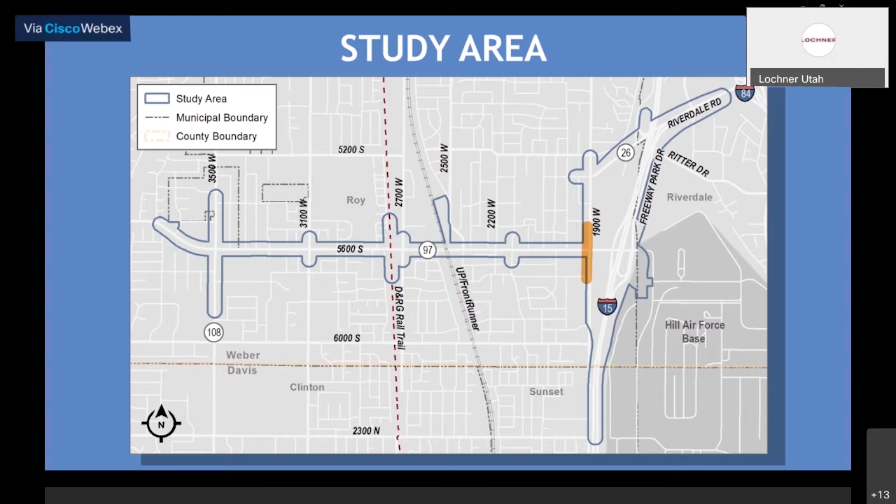The study area for the 5600 South Environmental Assessment is shown here. It includes 5600 South from 3500 West to the Hill Air Force Base North Gate, and includes modifications to the 5600 South and Interstate 15 interchange. The project area also includes improvements along 1900 West, from 5700 South to Riverdale Road.

The purpose of the project is to meet future 2050 travel demand on 5600 South and at the I-15 5600 South interchange, and to improve safety conditions within this study area.

The project is needed because by 2050, major intersections such as 3100 West, 2700 West, 2200 West, 1900 West, and Freeway Park Drive would operationally fail during the AM or PM peak period if improvements are not made.

The project is also needed because UDOT crash data reports a high number of congestion-related crashes, and it is predicted that the number of crashes could increase by 2050 as traffic congestion increases. In addition, several pedestrian and bicycle-related crashes have occurred along the corridor.

A goal of the project is to accommodate active transportation, or transportation that is powered by human energy, primarily walking and bicycling along 5600 South.

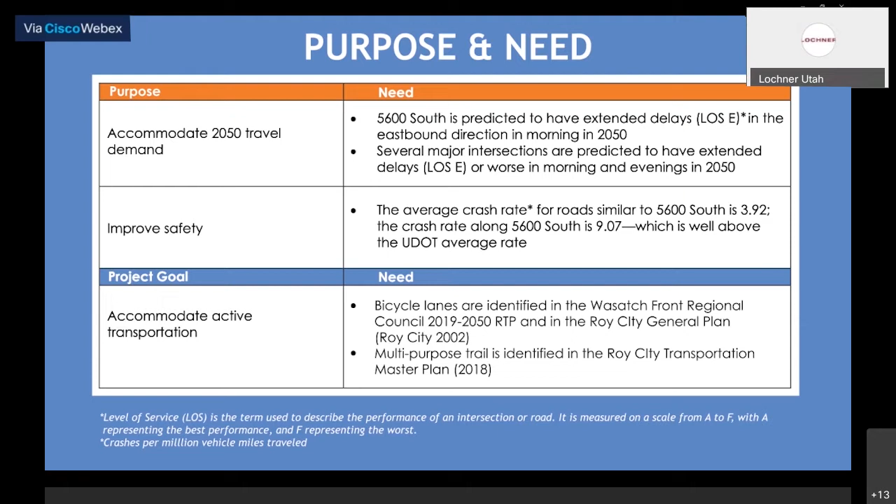Since the project scoping meeting held in 2018, UDOT has developed and screened alternatives to evaluate a range of design solutions. In fall of 2019, the team optimized the 5600 South alternatives to try to reduce the number of property and historic impacts, and identified a build alternative in winter 2019.

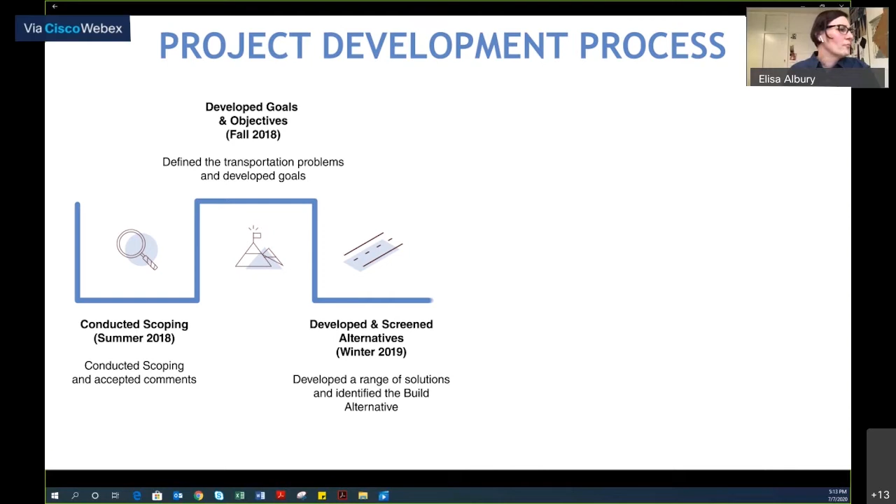The team evaluated the social and environmental impacts from the build alternative and the no build alternative in spring 2020. On June 23rd, UDOT published the environmental assessment for public view and comment. The public comment period is 30 days long and will end at midnight on July 23rd, 2020.

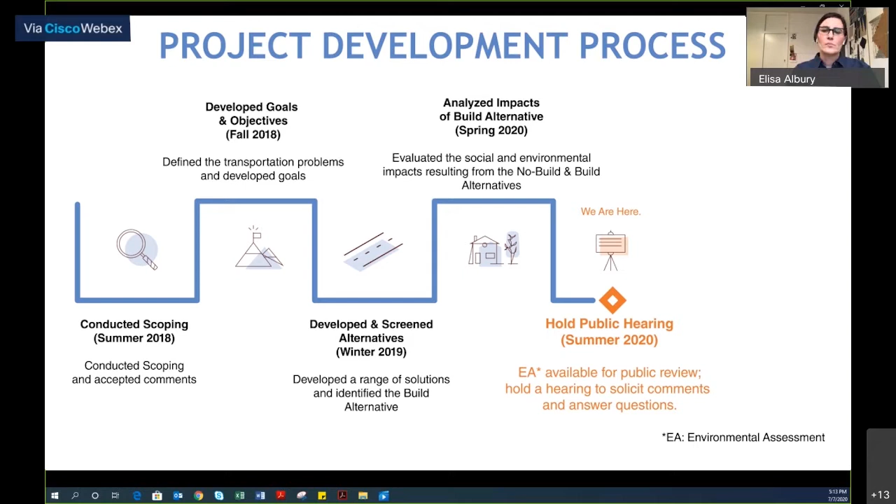Comments sent by postal service should be postmarked by July 23rd. The final environmental assessment and decision is anticipated in the fall of 2020. It will include response to public comments.

UDOT developed solutions called alternatives based on the needs identified for the study area. These alternatives were screened against the performance criteria identified based on the purpose and need for the project. Level 1 screening evaluated the alternative's ability to accommodate 2050 traffic demand and improve safety.

Level 2 screening evaluated the remaining alternative's ability to minimize Section 4(f) uses. We will define 4(f) uses later. It also evaluated minimizing acquisition and relocations, and ability to accommodate the project's active transportation goal.

In addition, UDOT evaluated a no-build alternative to provide a baseline for screening. The no-build alternative assumes the completion of all projects proposed in the Wasatch Front Regional Council 2019 to 2050 Regional Transportation Plan without improvements to the existing interchange or to the 5600 South corridor. You can find more details about this in Chapter 1 of the EA.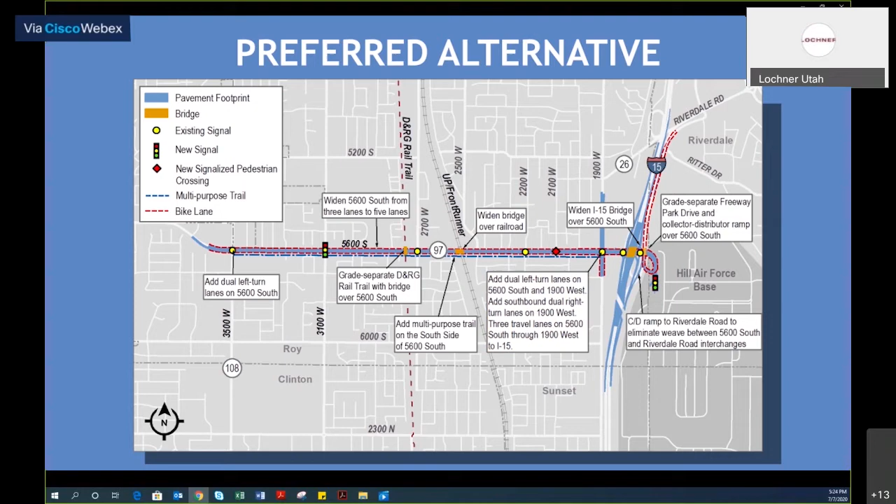It is anticipated the right-of-way acquisition along the south side of the corridor would result in surplus property. Surplus property is the part of the land that is not converted to a roadway facility after an agency, such as UDOT, acquires right-of-way for roadway improvement purposes.

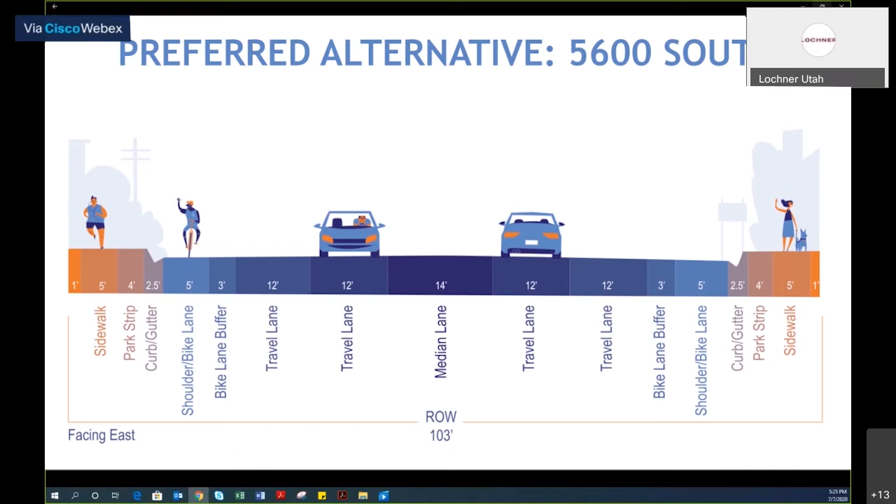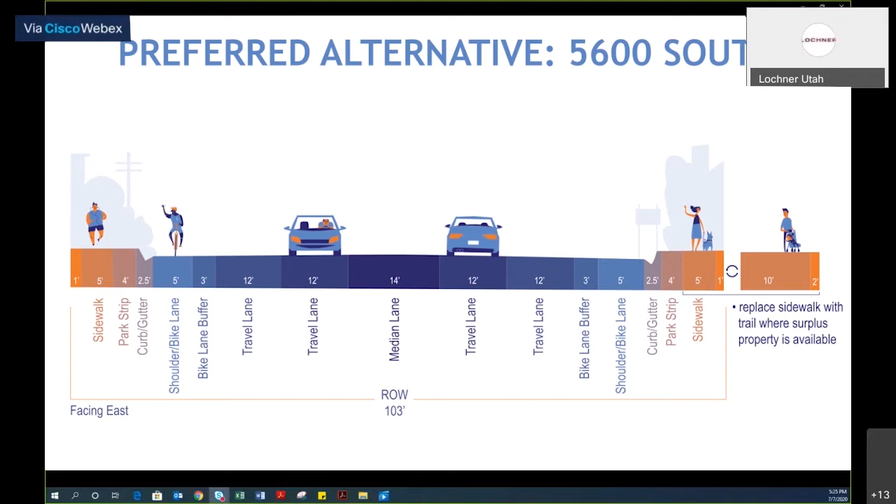UDOT elected to add the multi-purpose trail identified in Roy City's Transportation Master Plan to the build alternative as a result of this surplus. The multi-purpose trail would be located on the south side of the road and would replace the sidewalk where there is room. It would connect to the bike lanes on 1900 West intersection, continuing through the SPUI to Freeway Park Drive.

The single point urban interchange, or SPUI alternative, is selected as the preferred alternative at the I-15 interchange because it accommodates 2050 travel demand and improves safety. The SPUI improves safety by eliminating existing weaving on I-15 associated with the close spacing between the 5600 South interchange and the Riverdale Road northbound off-ramp.

The SPUI allows northbound drivers to exit at 5600 South and use the new bridge over 5600 South to continue north to Riverdale Road. In addition, the preferred alternative includes pedestrian and bicycle improvements, including bicycle lanes and sidewalk connection from 5600 South to Freeway Park Drive, and signed bicycle lanes in the shoulders of Freeway Park Drive on both sides of the road.

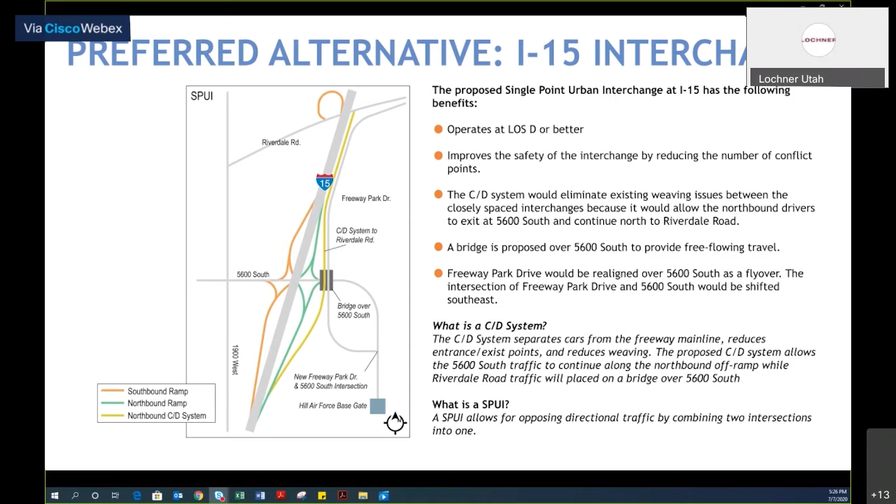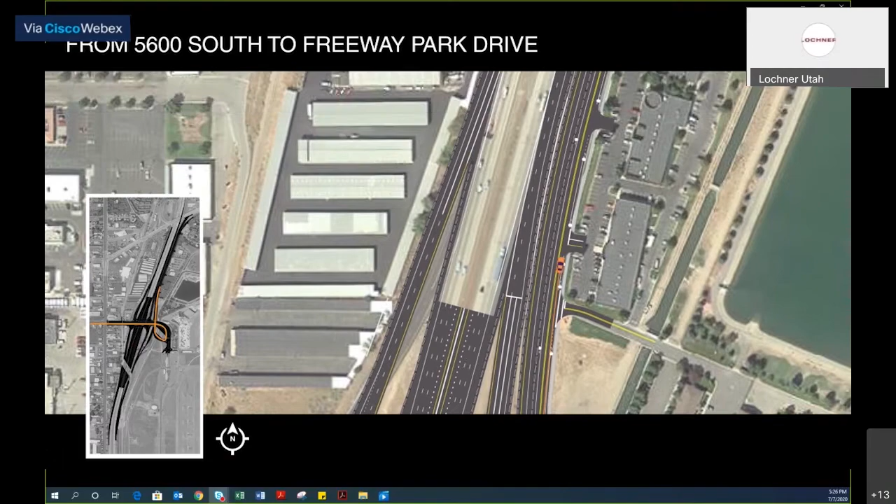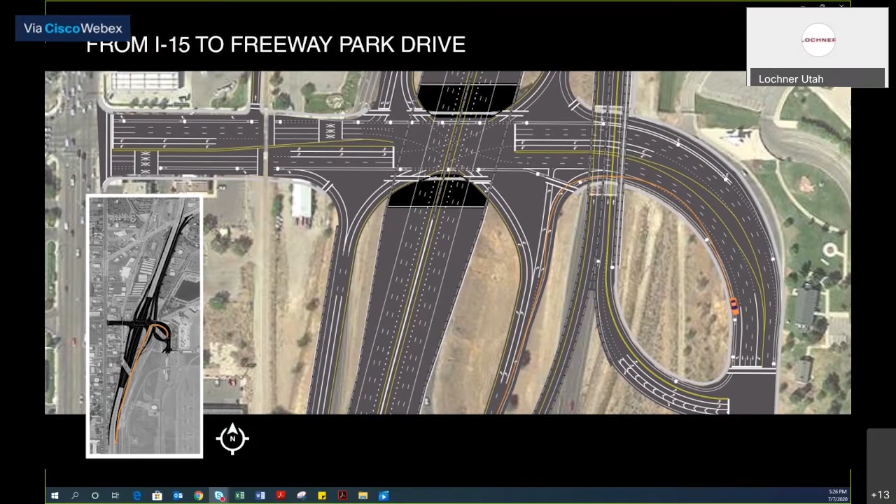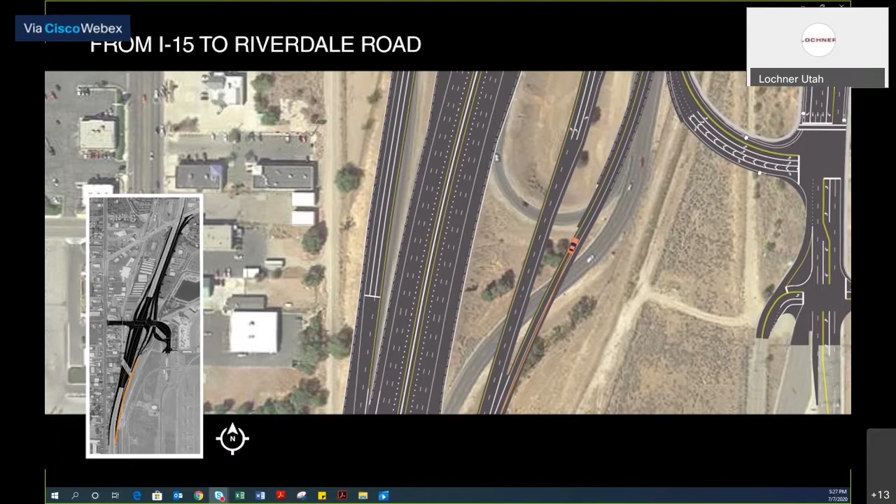This video shows how vehicles on 5600 South will access Freeway Park Drive, how vehicles on Freeway Park Drive will access 5600 South, how vehicles on I-15 can access Freeway Park Drive, how vehicles can use the C/D ramp to access Riverdale Road, and finally, active transportation improvements throughout the interchange.

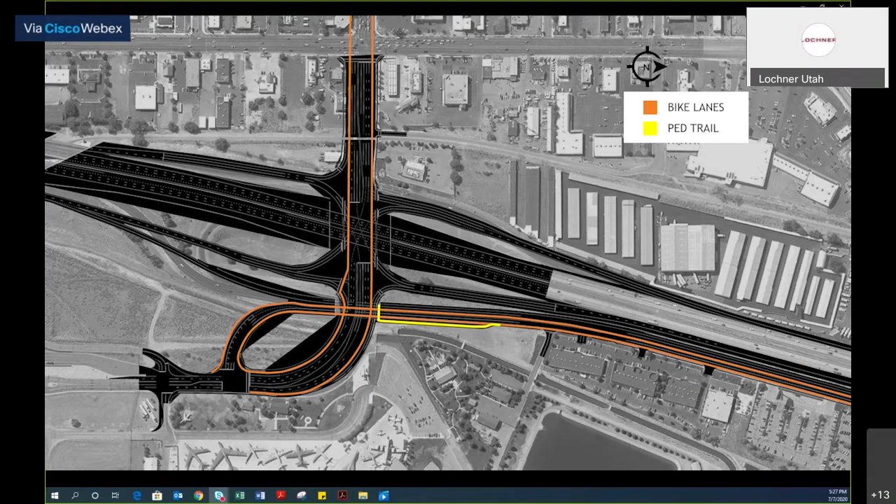The same summary table is located in the executive summary chapter, and impacts to each resource evaluated are discussed in detail in Chapter 3 of the environmental assessment.

The comment period is 30 days long and ends on July 23rd. All comments must be submitted by midnight on July 23rd in order to be included in the official project record and in the final EA.

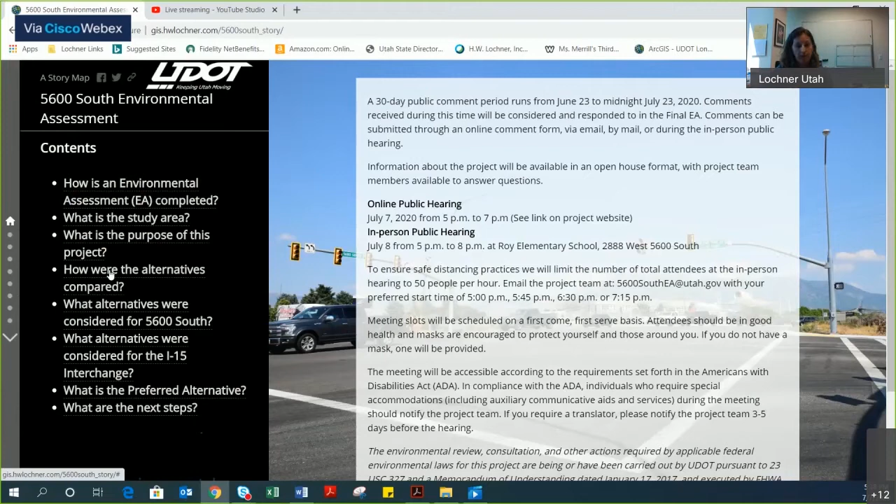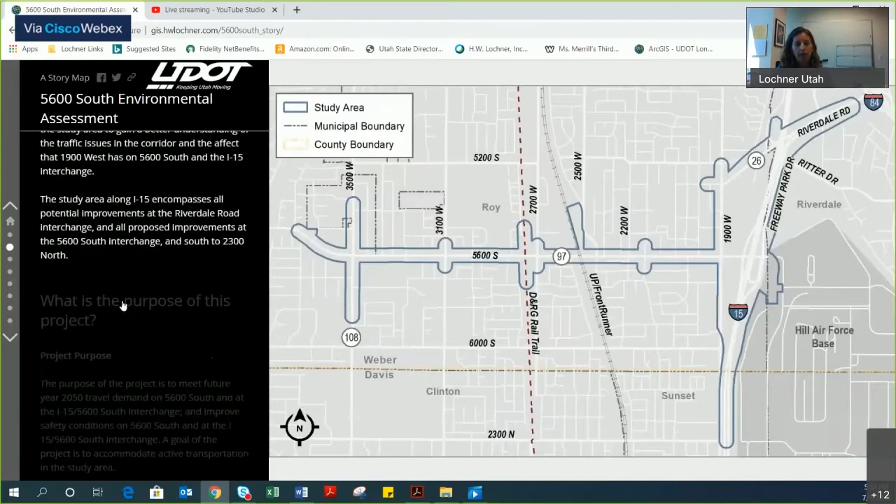Just going through a little bit, we have some of the same materials that we've presented tonight. I won't go too far into the details of the story map, but I want to show you that there are some links that will get you more information. Especially down at the bottom of the story map, this is the most helpful - that is where we have interactive maps that will show you the preferred alternative, the design, and the impacts.

So you can open up these links. It opens up almost similar to a Google Earth type format where you can look around the study area, zoom in on certain areas that you're interested in, and get more information that way.

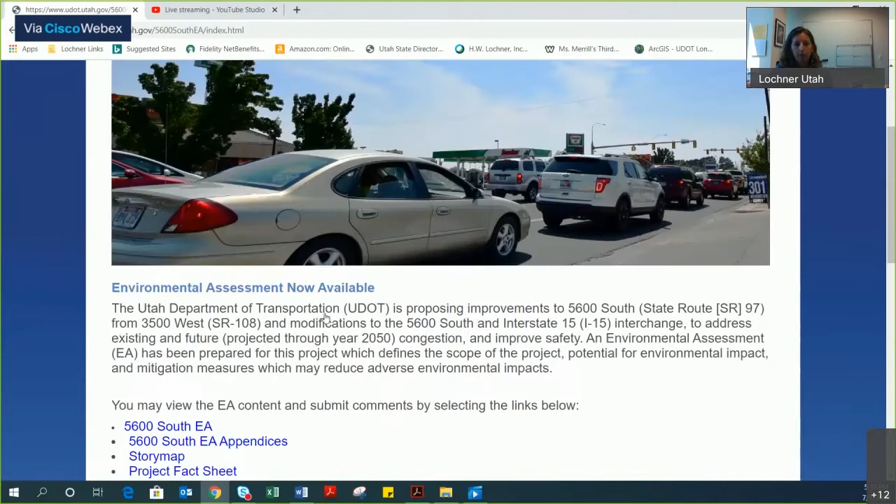Going back to the main landing page of the website, this is more information on how you can participate tonight and tomorrow if you'd like. Right here we have right-of-way materials, and as Tom had mentioned, we won't really be getting into the specifics of each property owner and specifics of each property.

In March of 2020, we did have a right-of-way workshop, and we reached out to individuals that we anticipate would experience a full acquisition from the project, and we presented these materials. It's an overview of the right-of-way process with some frequently asked questions, as well as some links to helpful materials so you can better understand the right-of-way process. We've left these materials available for anyone who's interested. Folks that might be identified as a partial acquisition might also find this interesting, and you can learn a little bit more about the process.

Here at the bottom of the right-of-way tab, it's the same contact information we've been giving out for the rest of the project. This will get you to our project team, and you can request a meeting with a right-of-way agent or request more information about your property. So you could either call or email the project team. It'd be helpful to leave your name and your address, and we can help get you in touch with the right people.

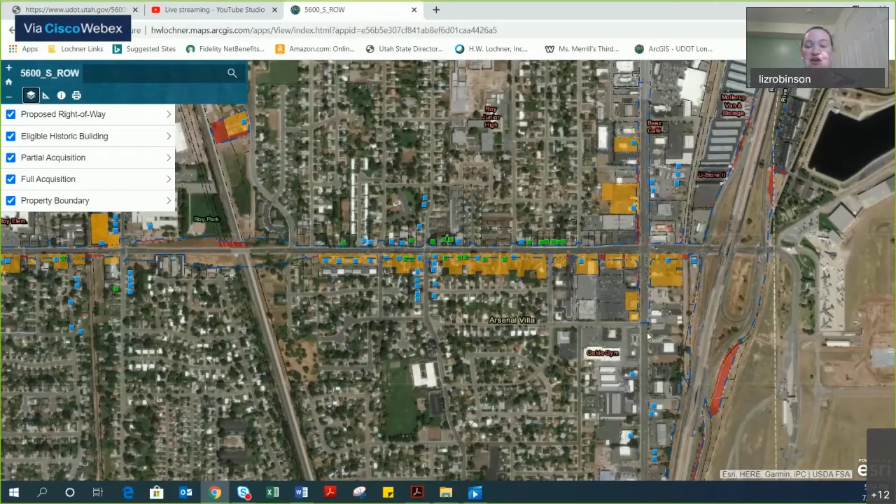Hi, my name is Liz Robinson. I'm the Cultural Resources Manager for UDOT. Historic buildings have been evaluated as part of this EA. They have been identified and studied, and as part of that process we identify those that are going to be impacted by this project, both by property acquisition and otherwise. We have negotiated what's called a memorandum of agreement for those properties that identifies the mitigation activities we'll be conducting to make up for the impact of affecting those historic properties. Those mitigation items include documenting the affected properties at a more intensive level, as well as other items we've identified, such as creating a history of Roy that will be accessible both online and in print form, and documentation of additional properties to help support that. So there is a process we are following with the National Register properties. None of them are listed on the National Register, but they are eligible for it. You can find a listing of those properties in the environmental assessment. They are summarized in the text, and the supporting documents are also available in the appendices.

All right, thank you, Liz. To chime in real quick, this is Dana. I apologize, I was late sharing the screen. This map you're seeing right now is also in the story map I had shown folks earlier. So just so you know, if you wanted to take a look at this, we do have this exact map available on the project website. All right, thank you, Dana.

Let's go on with the next question. This is an environmental question: there may be soil contamination in the rail corridor. Has this been considered, Dana?

Yes, this is something we are aware of and have considered. It's usually something we deal with a little farther down the line when we get to more refined design, and we may look at where we might encounter contaminated soil more specifically. UDOT usually works with the county to establish proper disposal. But at this phase right now in the project, we know it's there, we just deal with it a little bit farther down the line.

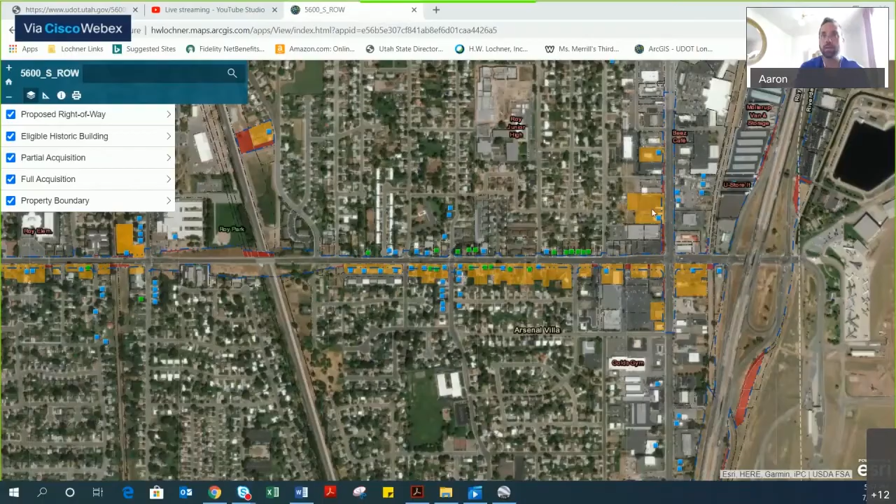Specifically right now, at least in the environmental design layout, I understand that during final design a lot of this gets re-looked at to make sure. But currently we're widening to the west on 1900 West, holding that east line. The number of lanes will still be 2 throughs in both directions, but the big addition at the intersection is dual lefts in all directions, as well as a southbound dual right. That southbound dual right is for the heavy movement seen in the PM peak, but a lot of the widening happens to the west from there up to Riverdale with the addition of those lanes and the queues necessary to meet the level of service needed at the intersection.

As far as the raised median goes, maybe I should touch on that. That was not necessarily evaluated in the environmental document in terms of whether there would be any addition of that. That would be another level of final design that would be reviewed and determined at that point.

All right, thank you. Let's go on to the next question. Is there a way to find out what houses are going to be impacted? Dana, do you want to talk about what's shown in the EA?

Yes, I can. That same map I had shown earlier, let me get you back over there, has a visualization of all the houses we anticipate would be impacted from the proposed project. In addition, Chapter 3 of the environmental assessment has a list of all the properties we anticipate would be fully acquired. Our appendices have a list of the properties that would be partially acquired. But if you want a better understanding, the interactive map on the story map will show you the proposed impacts, and you can zoom in on individual properties to get an idea of the anticipated impacts. I think we have about 75 partial acquisitions that we are anticipating right now, and 75 full acquisitions. So that is what we are anticipating at this point.

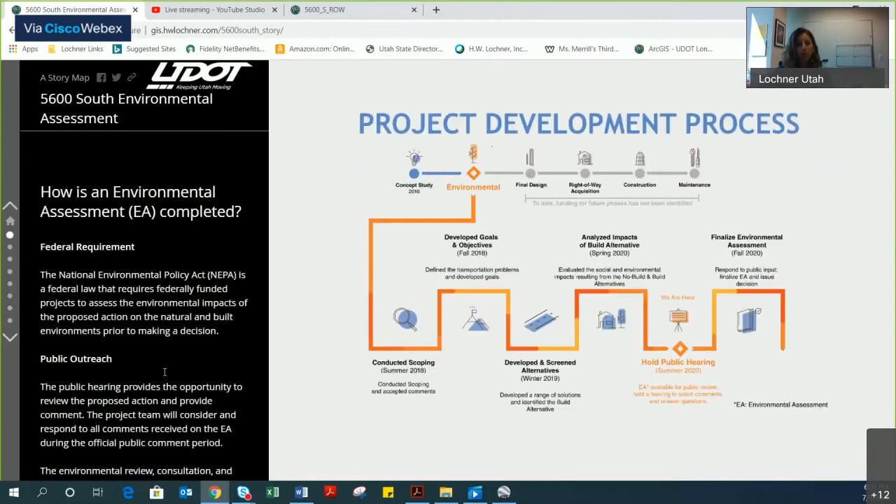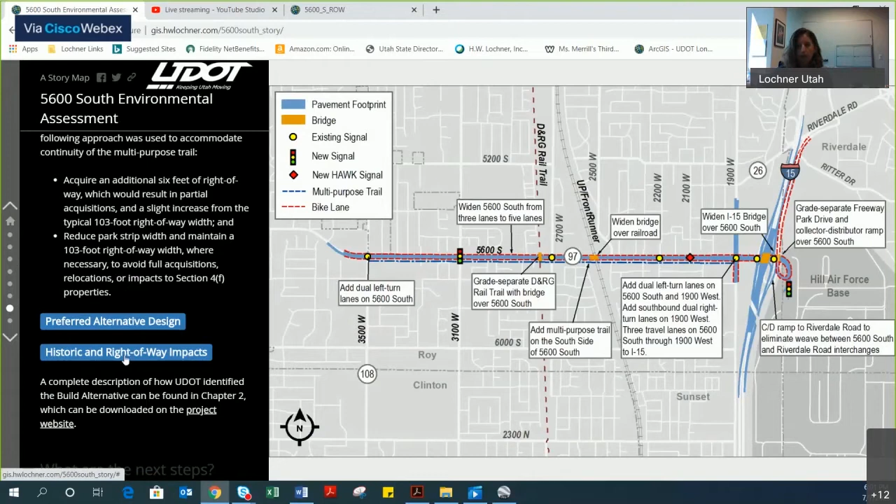So right now we have our project website, and you guys are seeing this right now, right? We're on the landing page of the project website. And right here, you'll see we have a picture of the corridor, and you can get to the project story map. You can click on that, and it will bring you through the project, like I explained earlier, from the beginning to where we are right now. If you get to the bottom of the story map, there is the preferred alternative design, which I had pulled up earlier, and the right-of-way impacts. I'll click on this right now. Hopefully it won't get too bogged down. This is what we're looking at. We have the proposed right-of-way right here.

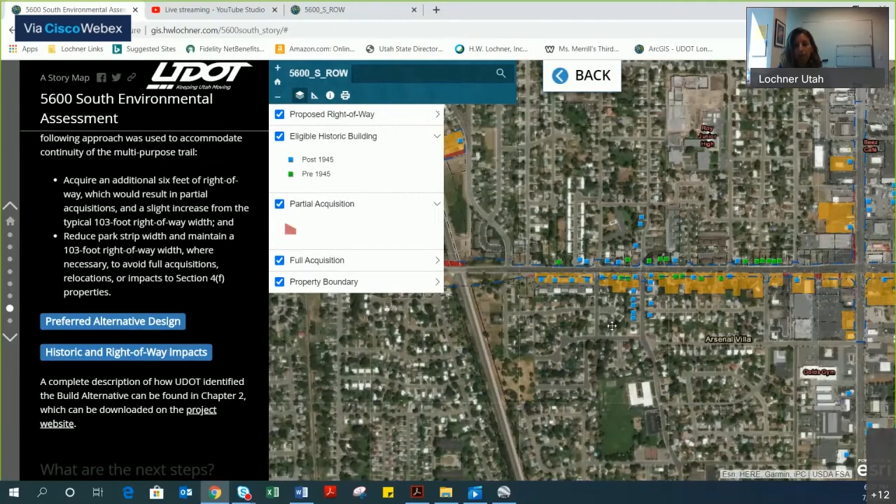We have eligible historic buildings. As Liz mentioned earlier, we did study the historic buildings in the area, and we categorized them as pre and post 1945. That's because of Roy's history, and we thought that would be a good way to categorize this. We have more of that in Chapter 3 and Chapter 4 of the document. You can toggle on and off any of these layers that you want to see. Here, the red are partial acquisitions, and yellow is what we're looking at for full acquisitions. That is where it's located in the story map.

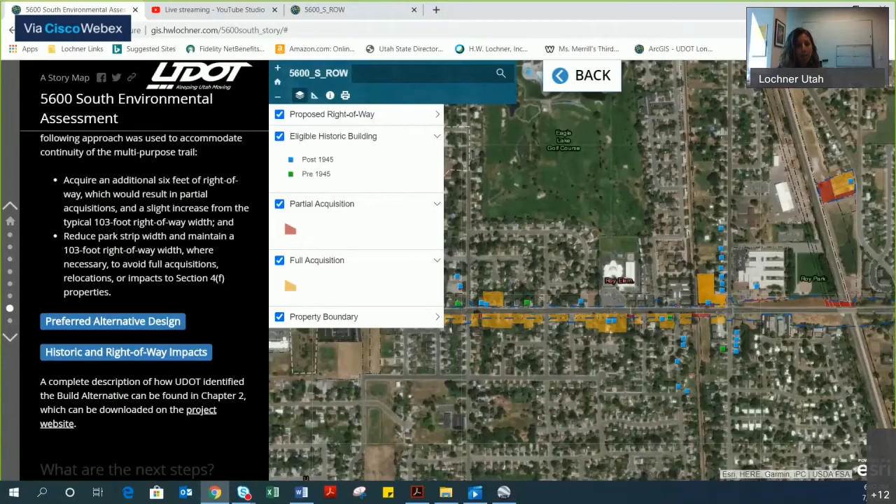All right, so the next question we'd like to talk about that came up: will property acquisition start before the total funding that comes in 2025 to 2030? Troy, do you want to talk about that question?

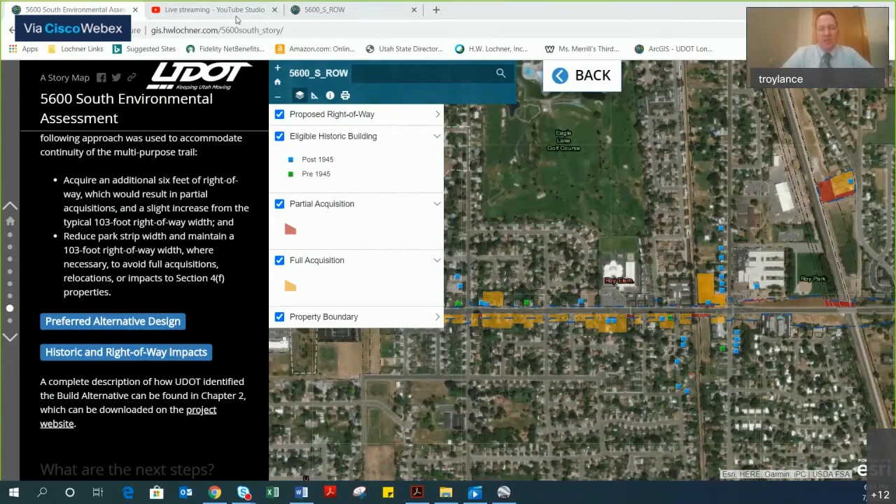Yeah, I can. So UDOT does have a fund to preserve corridors, where we can go prior to a known project and purchase properties. That fund, as I understand it right now, is pretty low. I don't know that we have a lot of funding left in corridor preservation. So at this point, I'm not sure if we can go ahead and purchase properties before, but you can for sure contact me if you ever get into a hardship or looking to sell your property.

It's definitely something that has to be a willing seller type situation. Maybe Kim O'Reilly can add some more points as far as requirements for qualifying to be purchased. But as of right now, the answer is we don't have anything set up to purchase properties for this corridor in 5600. That's not to say we wouldn't have something in the near future or prior to our project.

And thank you, Troy. Yes, that is correct. The reasoning for preserving the corridor, it does have to be a hardship situation, and there are limited funds. So you would contact Troy and talk to him about it, and we could take a look at the funding source of that type of purchase.

When a property is purchased with corridor preservation funds prior to a funded project, then relocation benefits do not apply. So again, like Troy said, it's a willing buyer, willing seller situation, and there are no additional benefits that you would have were you to wait for the funded project.

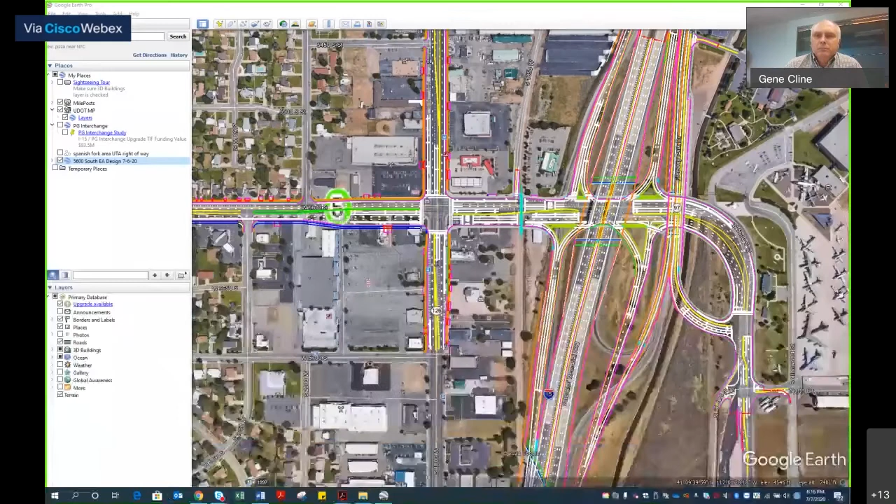There we go. So let's start at the interchange. You've got a couple of overpasses going on at the interchange. You've got the bridge for the SPUI, kind of right in the center of your screen, going up and over 5600 South. Then if you go east a bit, you've got a couple different overpasses happening there—there's one overpass... can you pan the other way?

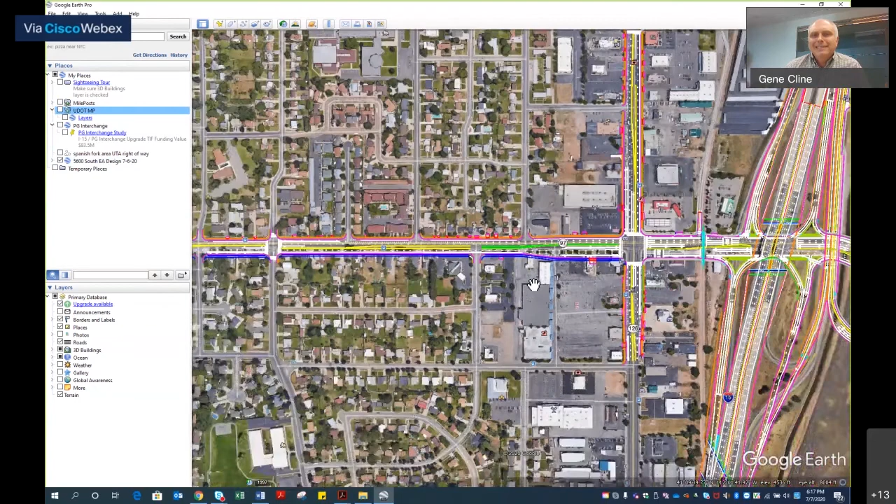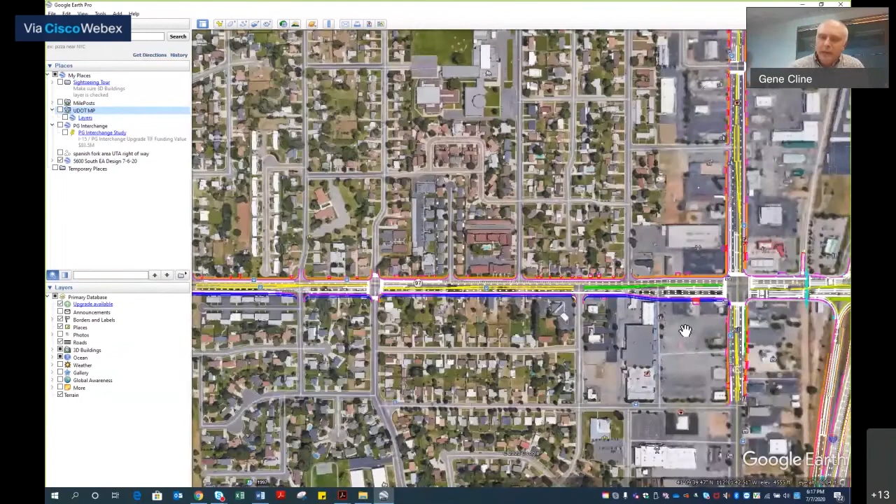Okay, there are a couple different overpasses going on at 5600 South. One thing we're doing with this project is relocating where you exit to the Riverdale Road off ramp. So if you're going northbound on I-15 and want to exit at Riverdale Road, you'll now get off the freeway in the same location as the 5600 South ramp, and then follow that ramp down.

You'll stay to the right on that ramp, and then there's a flyover that goes up and over 5600 South. From that point, you have a direct connection that goes north and connects you in essentially the same location that the Riverdale Road northbound off-ramp exits now. The only difference is you won't be battling traffic trying to get on northbound I-15 from 5600 South, so you'll have your own lane, improving traffic efficiency.

The other overpass happening in this area right now is on Freeway Park Drive. If you're coming south, there's an at-grade intersection right next to the ramps going northbound onto I-15, which connects down to the loop ramp that gets you to northbound I-15. With this project, that at-grade intersection is going away, and it'll become a grade-separated intersection that goes up and over 5600 South, then comes down and ties in just east of I-15 at an at-grade intersection there. From there, you can access I-15, 5600 South, or everything on 1900 West. So those are the general overpasses happening in the interchange area.

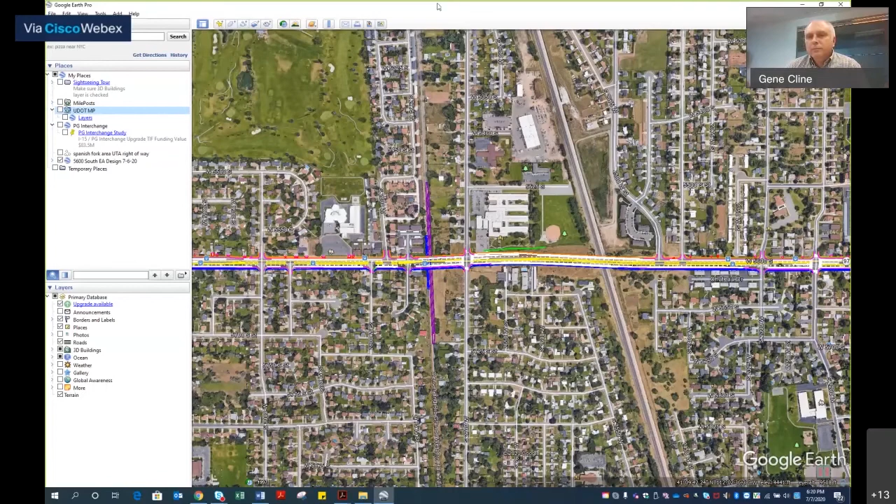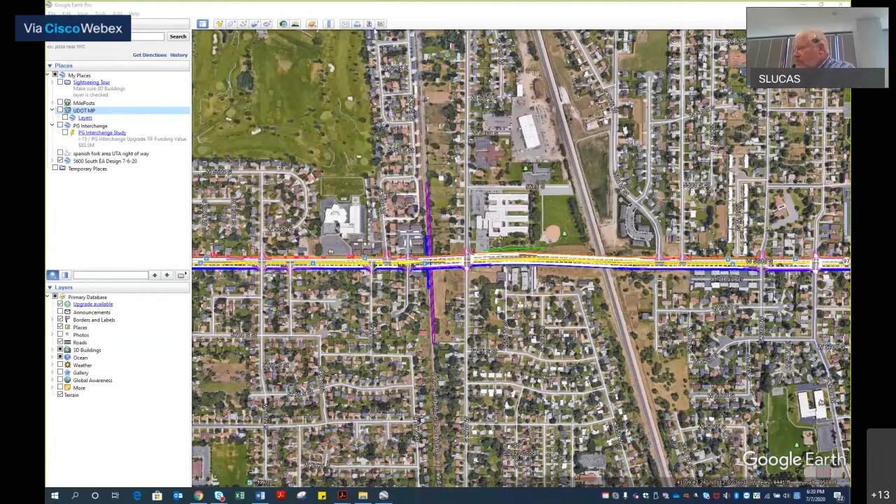Okay, so we seem to have a lag in the questions here. Can we have the online person in the queue given an opportunity to speak? Okay, the person in the queue, you want to speak up, let's see if we can hear you. Can anybody hear? I'm just hearing your announcement too right now. We're working on it. I think the speaker can go now, I think we had them muted. So speaker, if you're ready now, you can start. Okay, lift your finger with your mouse again. Good, one more time. Yeah, go ahead, lift it up as much as you can. There you go, and then relax. Okay.

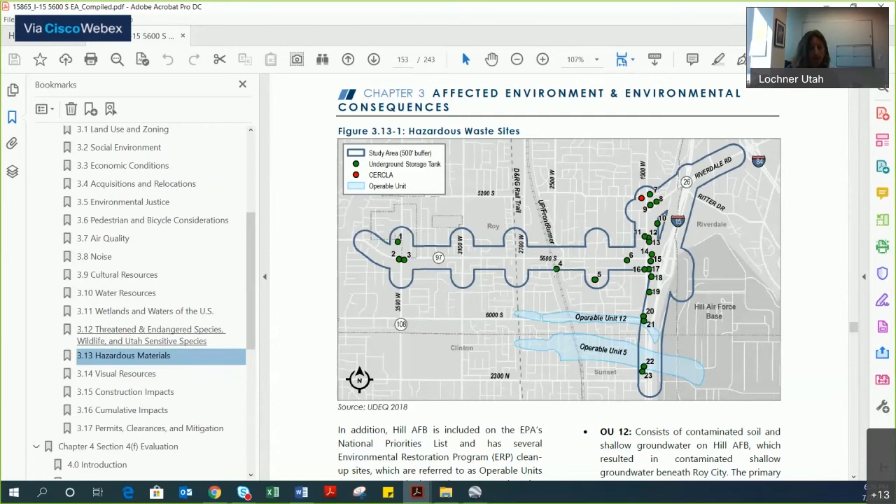All right, let me make sure I am sharing the right screen. So I thought it might be helpful, because we did get a few comments on hazardous materials. The environmental assessment available on the project website, in chapter 3, has all the resources listed that we evaluated for the project. Section 3.13 is hazardous materials, and these are the hazardous material soil areas referenced from Hill Air Force Base. We also know there are some associated with UP and FrontRunner, and those are listed out in a table as well. So for anyone interested, you can check into that and see how we categorized things.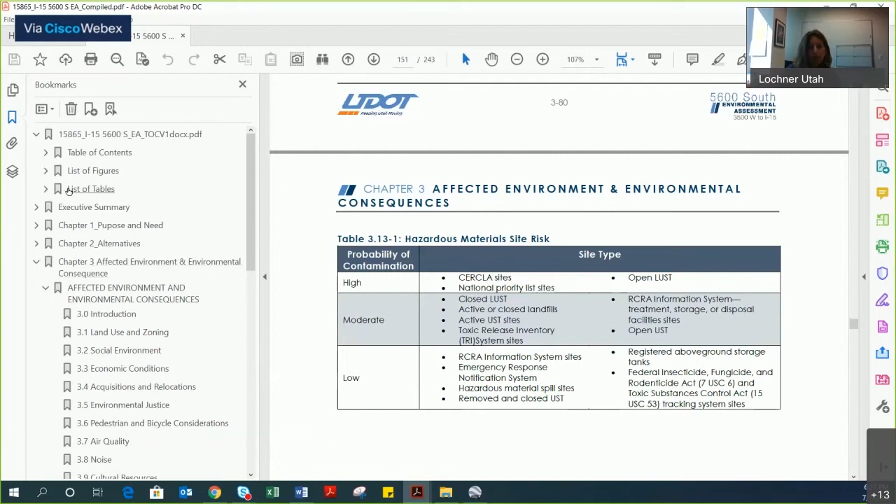If there's something you feel should be noted, please feel free to submit a formal comment. Hopefully that helps you navigate a little bit in the EA. We put bookmarks in it, so you can download the document and click the bookmarks to navigate your way through to the areas that interest you most. That's all.

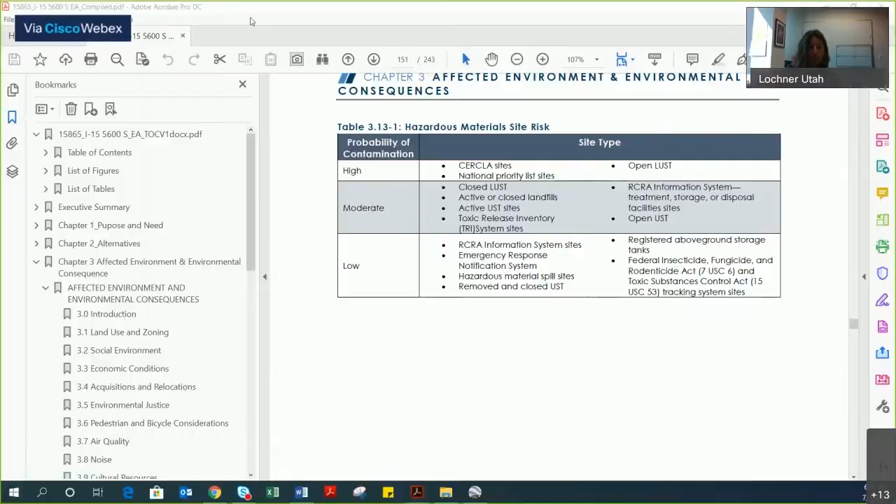There was another question about the animation - the video shows 56 South going over I-15. So is 56 South going over I-15? The answer is no. I-15 will continue to go over 56 South, even though the video kind of showed the car driving on top. I-15 will continue to go over 56 South, and the bridges for the freeway and Freeway Park Drive will go over 5600 South.

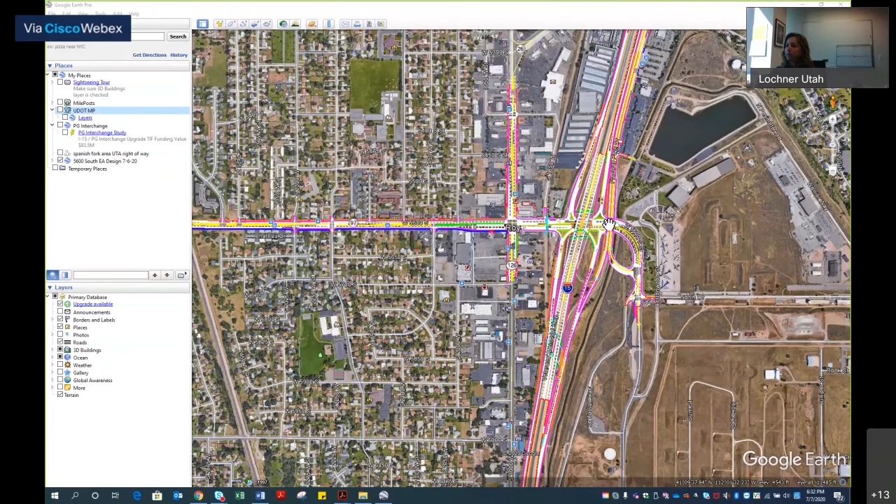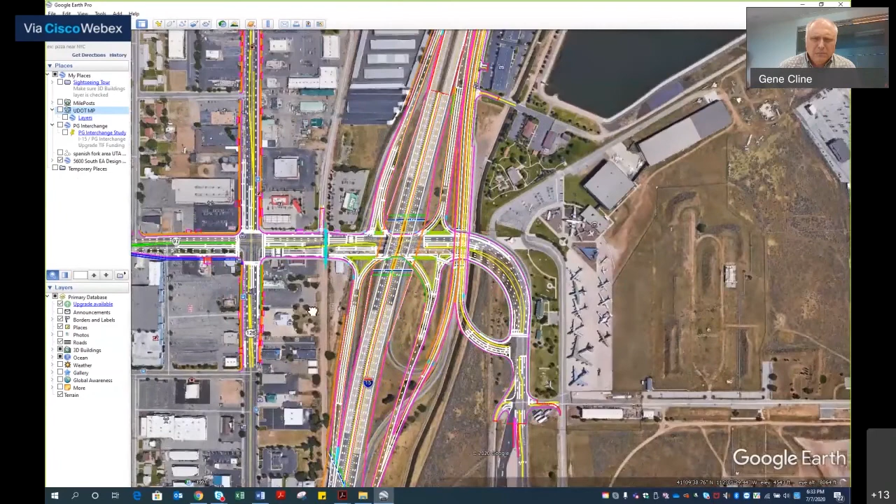Yeah, so we've increased the number of lanes going into Hill Air Force Base. Dana, if we can pull up the design, that'll make things clearer. Just zoom in right there as we come under I-15 and go into Hill Air Force Base. So we've increased the number of lanes coming both under I-15 and around that bend toward Hill Air Force Base. We've got three through lanes coming through into Hill Air Force Base, as well as a right turn lane that accesses the Freeway Park Drive flyover.

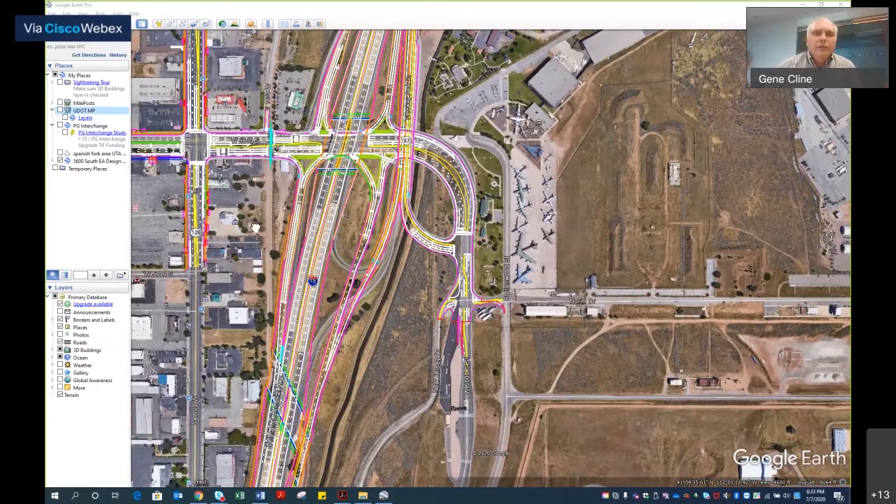We've also got additional lanes coming northbound, leaving Hill Air Force Base in the evening. In addition, we've done some things at the freeway - the SPUI will be a more efficient interchange, and with its dual left turns it should handle more traffic coming out of Hill Air Force Base trying to get onto the freeway in the evenings. With those improvements, the interchange and access to Hill Air Force Base should accommodate traffic more smoothly.

I'd just add that right now there are two through lanes in each direction on 56 South that access Hill Air Force Base, and we will be increasing that from two lanes in each direction to three lanes in each direction with this project.

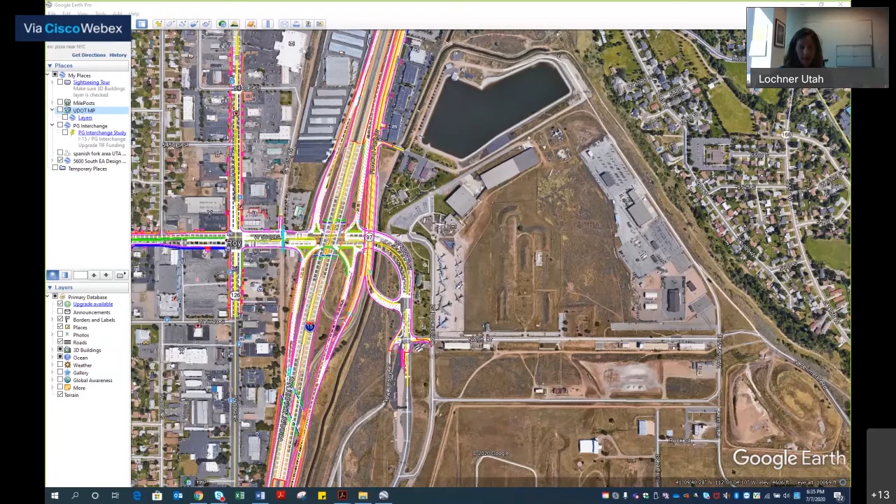I'm going to go ahead and mute the caller just because we're getting some background noise. But yes, we do have a list. It is in section 3.4 of the environmental assessment, and you can find it there.

The document is available at Roy City. I believe there's a copy at the library, Kent, correct me if I'm wrong. And we have a copy at the UDOT Region 1 office in Ogden, though you need to call and make an appointment. But...

Sorry, I'm trying to find the exact name of the library where you can go access it without an appointment. I believe it's in Roy. I know you mentioned you're not on the website, so Kent, if you want to chime in with the name of that library, it's escaping me right now.

Oh. He's looking it up. It's the southwest branch of the Weber County Library.

So that is at 1950 West, 4800 South in Roy. Again, it's the southwest branch of the Weber County Library. That's one of the locations you can go view the document without an appointment. Otherwise, there is a copy at Roy City Hall, though I'm not sure how they're addressing letting folks in due to COVID-19.

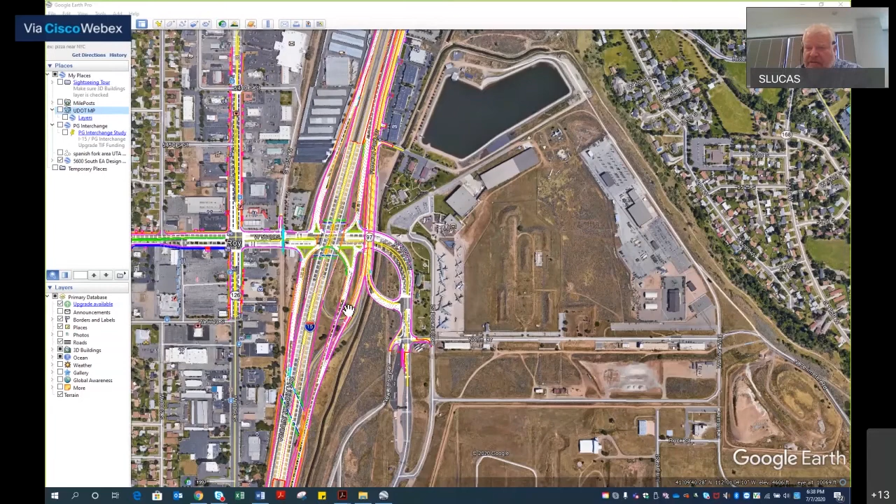The next comment that came in: is it anticipated that a major part of the Hill Field traffic will be taken by that interchange at 1800 North in Davis County before the 5600 South project is constructed, or after?

Ivan, do you know the timing, or Tom? Yeah, I can chime in on the timing. I'm the project manager for 1800 North as well. Of course, we know that's just a little bit further south than this, than 5600 South.

We actually do that project. The interchange itself does have some funding identified for 2024, so we will start the design likely towards the end of 2023, with construction probably in the 2024-2025 timeframe. So it's likely that, and maybe we'll let Ivan talk about what impact that might have on the traffic of 5600 South. But that gives you the timing for that interchange at 1800.

Maybe we'll let Ivan chime in a little bit. Yeah, absolutely. So the interchange itself will carry some traffic.

Obviously, there's a question as to whether there'll be a gate into Hill Air Force Base at the same time. I know the base is planning on building a gate there at some point, I'm just not sure if it will be there from the get-go. So we definitely will see a shift in traffic volumes down to the 1800 North interchange.

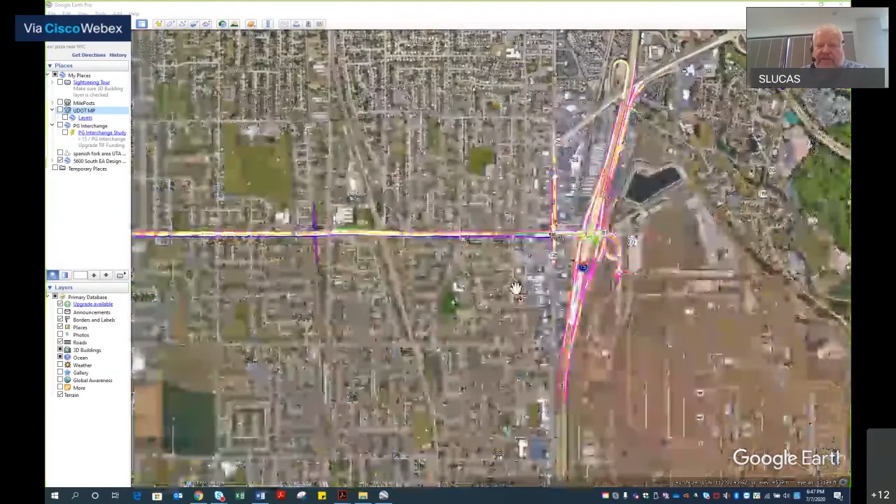What we are doing at the interchange is changing the existing interchange to a SPUI interchange, where all the ramps come together underneath the bridge, similar to Riverdale Road, except Riverdale Road's is on top, whereas here 5600 South would be on the bottom. Riverdale Road at I-84 is a SPUI interchange that sits on top of the freeway, but here it would be the same type of SPUI interchange that sits underneath I-15.

We are also combining the 5600 South northbound off-ramp with the Riverdale Road off-ramp and providing a CD ramp up to Riverdale Road to eliminate any congestion weaving we have between 5600 South and Riverdale Road.

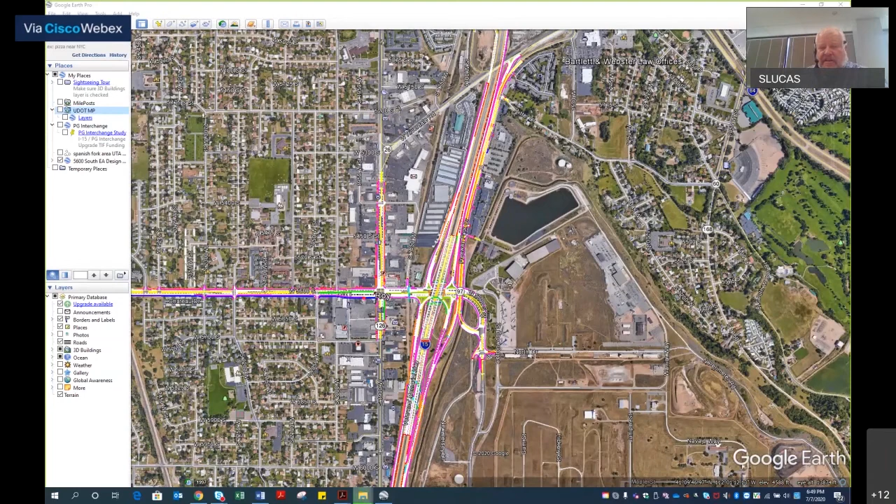On 5600 South, we are adding an additional through lane in each direction, so there will be a median and 2 eastbound, 2 westbound lanes between west of 1900 West, along with bike lanes, sidewalks, curb and gutter, and a trail along the south side. From 1900 West to Hill Air Force Base, we will have 3 through lanes in each direction that go to the Hill Air Force Base entrance.

At the 1900 West intersection, we will have dual left turn lanes in all directions, along with a dual right turn lane from the southbound direction on 1900 West to the westbound direction on 5600 South. So that's kind of the proposed improvements.

We will have a bridge that goes over the railroad at the FrontRunner line. It will be wide enough for the road section we discussed, 2 through lanes and a median in each direction, bike lanes, etc. It does accommodate for the future double tracking of the FrontRunner.

There will be a pedestrian bridge at the D&RG rail corridor for pedestrians to go up and over 5600 South. We'll be adding a new signal at 3100 West, and a new Hawk signal at 2100 West to access the junior high. The existing Hawk signal at the elementary school will be maintained.

And then there's bike lanes along 5600 South in both directions. Those will also go underneath the freeway and loop around onto the Freeway Park Drive road that goes up and over 56. So the bike lanes will be continuous on Freeway Park Drive and also along 5600 South.

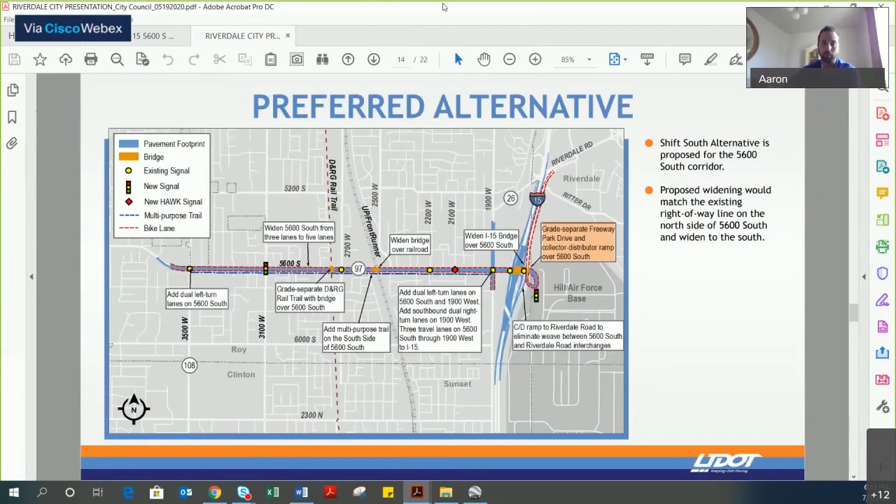There's a question about whether there will be a speed limit change on 5600 South. For 5600 South, there will be an increase to 45 miles an hour, which was determined. UDOT uses a lot of the speed studies taken out there to understand what the traveling public is currently running at, and also recognizing that the facility is going to be widened to two lanes in both directions for the majority, it made sense to make that increase. So that's currently what the environmental design was done along the corridor, to account for a speed increase to 45 miles an hour.

All right, thank you. So there's another question here: will a person be able to turn north onto the parkway east of the freeway from 5600 South?

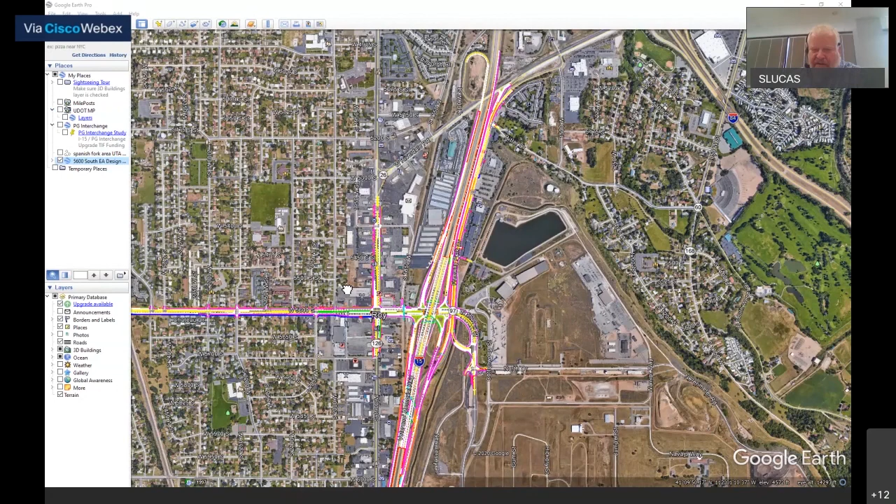Access to Freeway Park Drive, which is east of the freeway, will change a little bit. You won't turn from 5600 South, turning left or north onto this parkway. Freeway Park Drive, coming from the north, will go over 5600 South and then loop around and connect into 5600 South. So if you're on 5600 South, you will continue through until it loops to the south, and then you make a right turn onto Freeway Park Drive to go north. It'll be better access to Freeway Park Drive through a right turn, not having to wait for a left turn through heavy traffic. So you'll make a right turn onto the new overpass that goes over 5600 South and then continue on to Freeway Park Drive to the north.

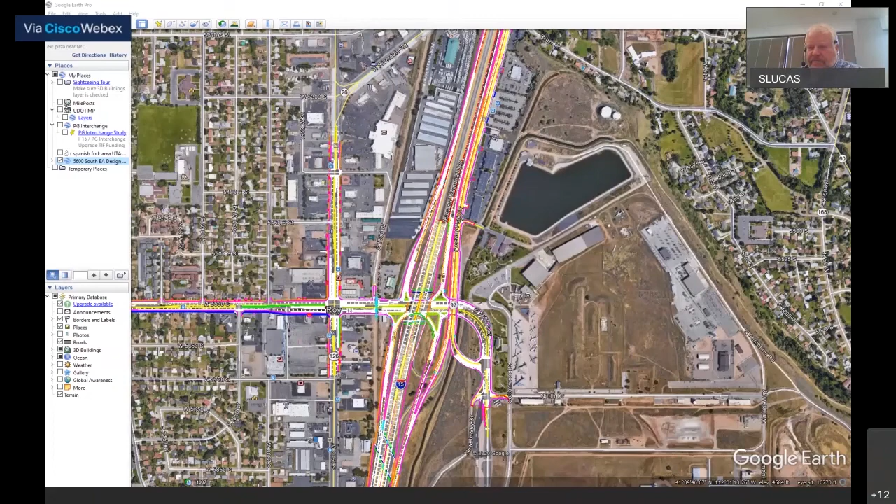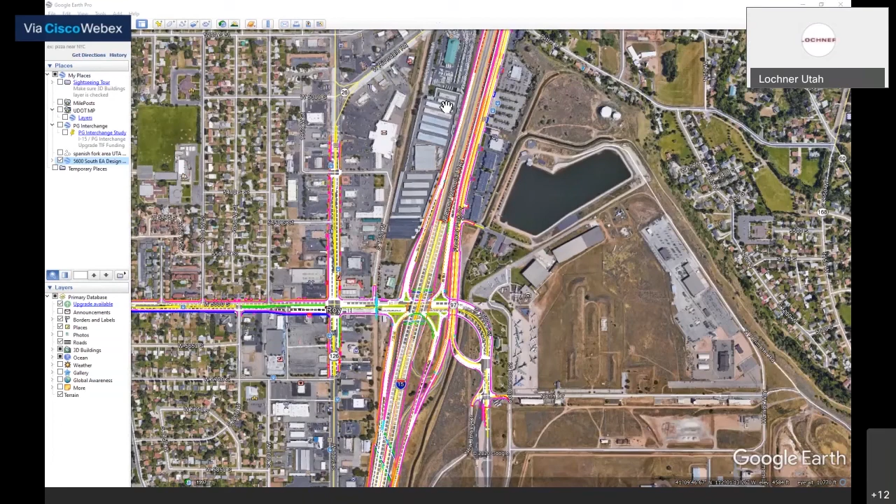Dana, is that video embedded, or is it just available on the story map as a link? It is available in the story map as a link. I can pull it up. Okay, real quick, so you just go onto the story map and find the link for the video.

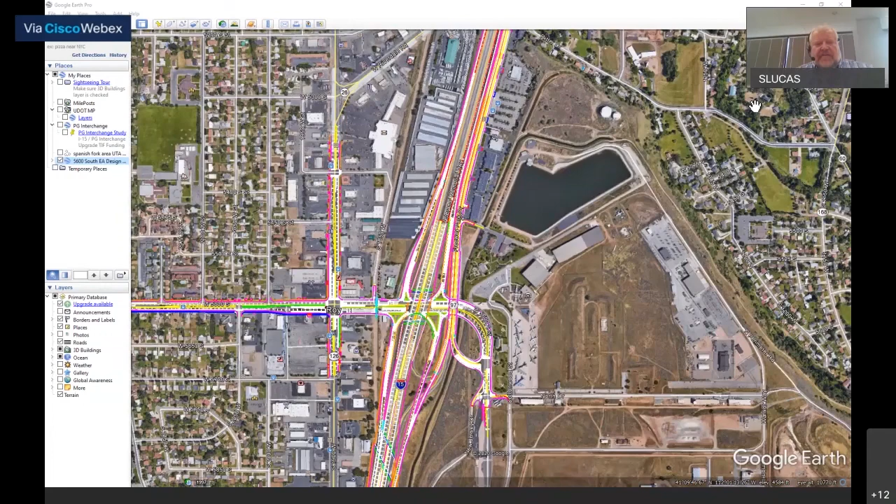I'm being told also that this video is on the public meeting page. There's another video called the single point urban interchange video, which is the same video we're talking about, so you can access it on the public meeting site also. But go ahead, Dana, one more time, now we can see your screen.

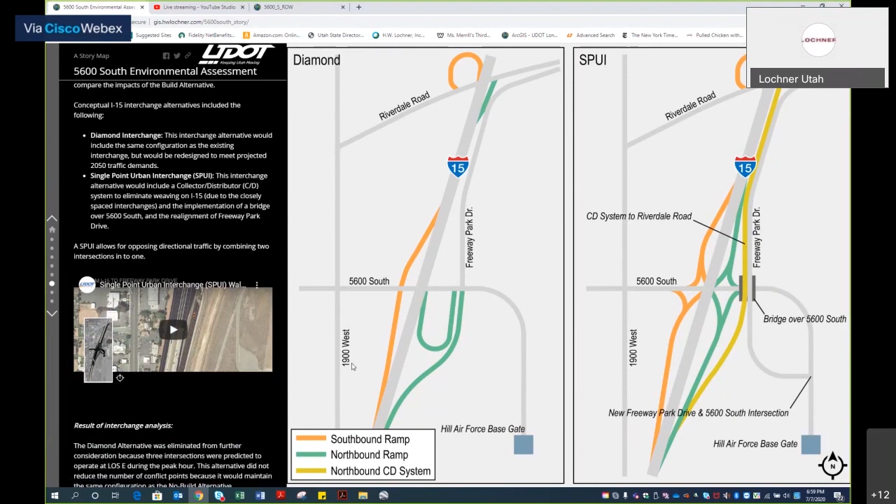Okay, sorry about that. So we're in the story map, and when we get through the alternatives that were considered for the I-15 interchange, we have a summary of the Diamond interchange that we looked at and the single point urban interchange, the SPUI, and we created a video of that one because it is a little hard to explain in writing.

And so that video is right here. You can click on it and watch it, and you don't need to watch the entire overview video that we also have posted on the website. All righty, thank you.